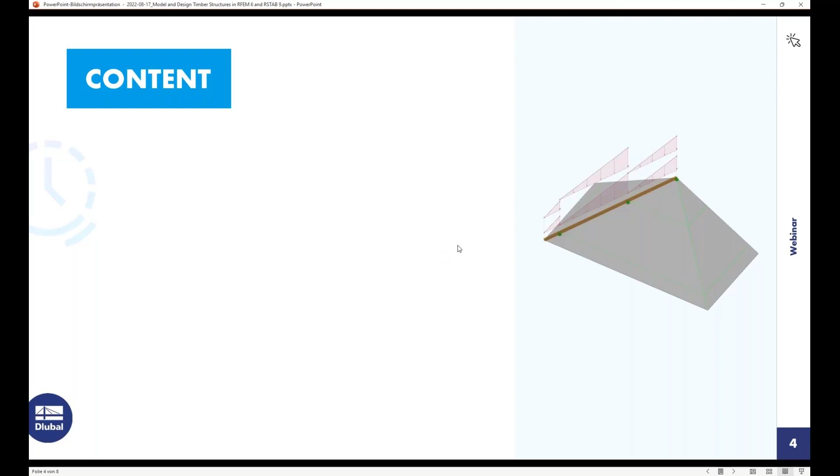Today, of course, I don't want to do a 3D structure again, because there are a lot of different ways and options to show things. Today I'll present a really small object. But let's go to the agenda. We will model a hip rafter for this hip roof, or a part of a hip roof. I will not model the whole roof because of time constraints. But don't get me wrong, I don't want to show you how to design, in this case, a two-span beam with a cantilever. That's actually not the aim.

The aim is, of course, loading. How do we get the loads on this beam, when we talk about the tributary area? That's maybe not so well known, how to get these tributary areas for this kind of beam, and that's one big issue.

And of course, we will design the component, in this case the hip rafter. We will spend a bigger focus today on the printout report. In the last webinars for the design add-ons, steel, concrete and so on, we didn't spend much time on this. Today I want to spend a bigger focus on it, since this was always asked. The aim is to get a really small documentation with all necessary inputs, without creating hundreds of pages, for example.

The reason I show you topics 1 through 4 is topic 5, which is about parameterization, blocks, and scripting. The aim is to give you an environment where you can use this beam, or this kind of beam, easily and repeat the input. For example, with parameterization, where you enter just a few values, the length, the inclination and so on, to get results really quickly. And this is the big aim.

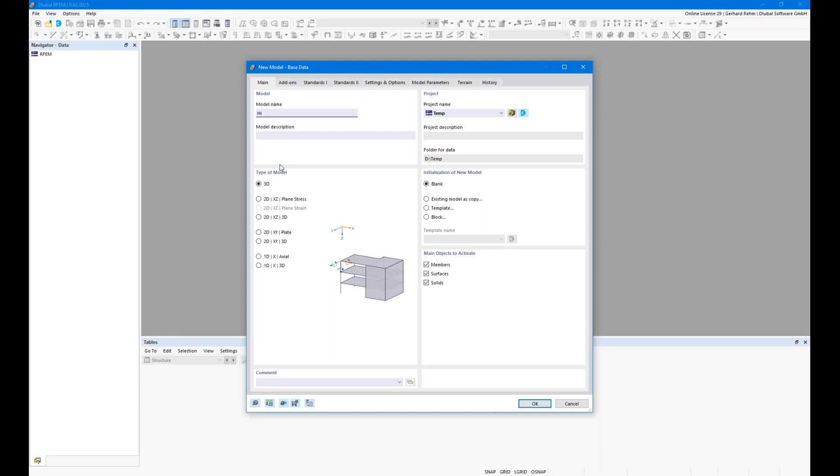Okay, so let's not waste more time with the presentation. I will go directly to our program, to RFEM 6. I will not mention all the changes compared to RFEM 5, because we already did this in our previous webinar. So I will give it a name, hip rafter, and I will activate the timber design add-on.

I don't need the load wizard because I will apply the loads manually. We can select the standards; in this case, I select Eurocode 0 plus the SLS combinations for timber, and I'll leave it at the global Eurocode. Of course, you have plenty of national annexes as well, but we'll leave it with the global Eurocode. That's all for now, and then let's create this hip rafter.

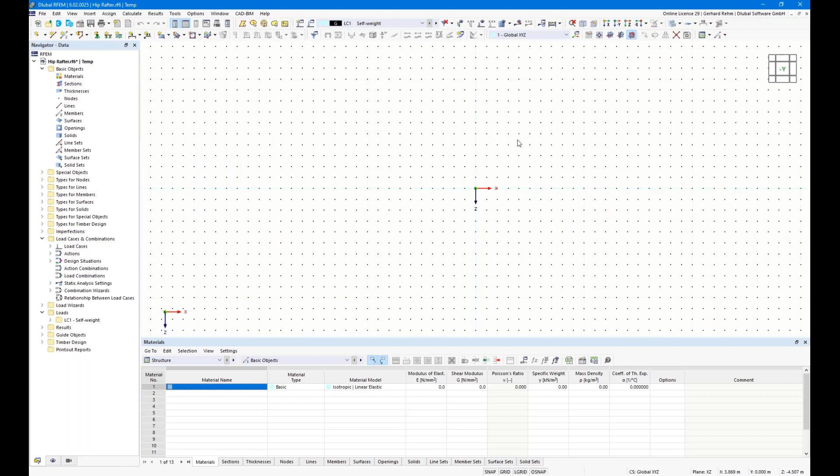So the normal roof should have an inclination of 30 degrees, and let's create the beam. I use this tool, length and direction, and select this line, length of 10 meters, and I need to change this angle to 120 degrees to get an inclination of 30 degrees. All right, here we go.

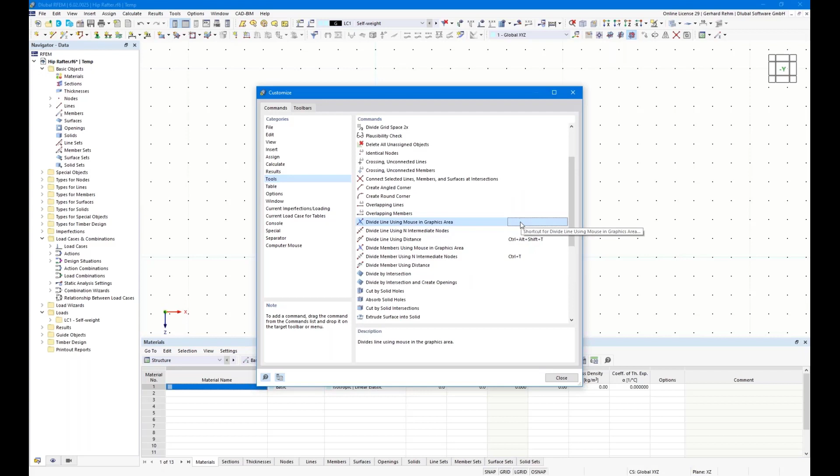Now I need to create a cantilever and the spans in between, so I will divide this line. There's already a shortcut for this option defined. You can define shortcuts under View, Customize Menu and Toolbars, find the correct tool and apply the shortcut by double-clicking it. So I hit my shortcut, and I will divide it for the cantilever by 0.8 meters with a projected length of 0.8 meters. Again, the half width of the building should be 6 meters, so I will enter 6 meters here.

Okay, and I will add another purlin, the same as we see here on the screen. So we have a purlin here on the bottom, or a ring beam for example, and here we will have another purlin or maybe walls, so it depends on the construction of course. So I will divide the line again at 3.50 meters.

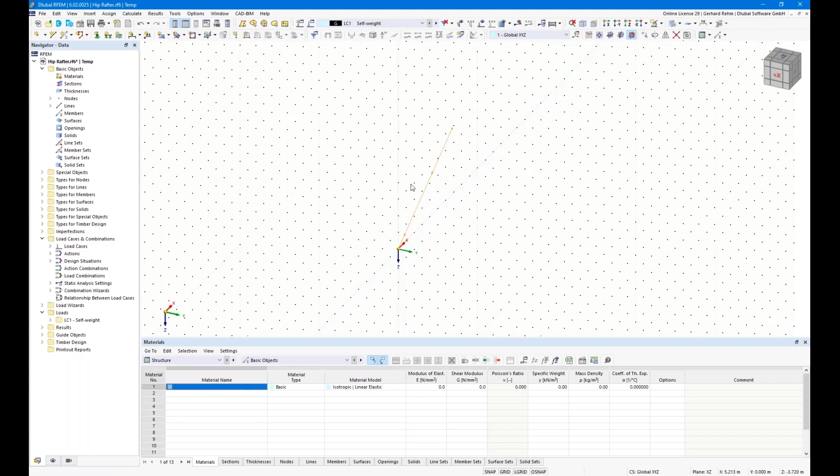All right, so that's it for one roof side. Now I will create this hip rafter. We choose the same inclination on both roof sides, so in this case it's easy. There are more options to create this hip rafter, but of course I can show only one.

So let's create a copy at a distance of 10 meters. Here I use this option, step links, and I can directly add lines in between the nodes. Okay, I will rotate it by 90 degrees, or minus 90 degrees, around the apex. And I will copy and move these lines minus 10 meters.

And that's it actually. Now I will use the connect tool, which is over here, and connect all the lines. I can delete the unnecessary lines and nodes again. Switch off the grid, and now you can directly draw this line, which represents the hip rafter.

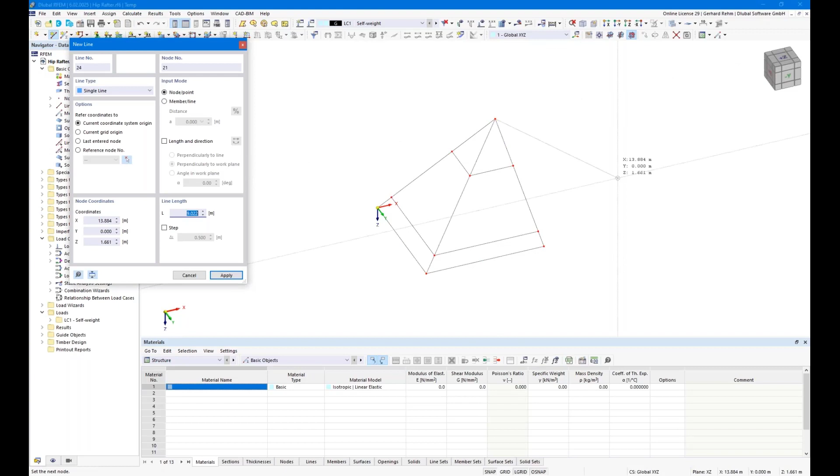All right, we will mirror everything around the mirror plane, which is in the YZ direction, or in the YZ plane, and the point B is exactly here in the apex. Okay, so we don't need this line, and this line, and this line, and also not the nodes, so I will delete them.

Okay, so let's define the rafter. We can use the tool here, create new single member, or we can just select the lines, and I will activate the member option, and now I can assign a cross section and a material. Okay, let's start with a cross section.

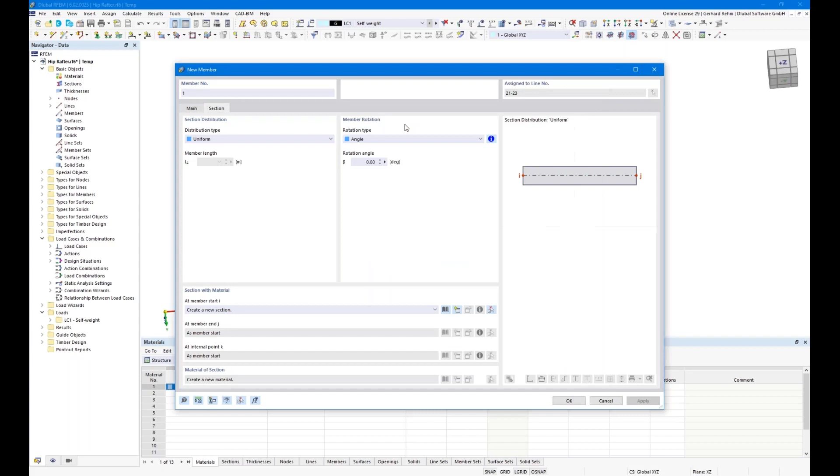In this case, the minimum height of the hip rafter depends on the jack rafters. So let's say the jack rafters have a height of 20 centimeters, and because of the inclination of 30 degrees, it's 20 divided by cosine 30 degrees. So the minimum height is at least 23 centimeters. Let's start with 24 centimeter height. But of course this is not the full truth.

When you think about some notches like the bird's mouth cut, or the cuts on the top side, there are also different sections on the bottom, but we will come to this later. First we start with a simple rectangular beam. All right, so let's start with 100 by 240.

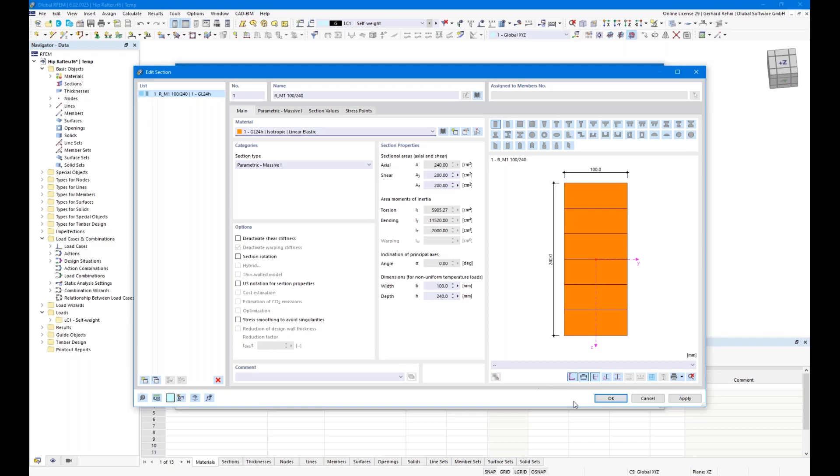And let's assign a material. In this case, you can use the filter or just enter your material directly in this search function. I can select this material, GL24H according to EN 14080. All right, that's it so far. I just hit the OK button, and now I have this beam.

I don't want to have the beam also here because it's symmetric. So I just added this to the structure to show you what is possible with loads and so on for later. Okay, then of course we have the beam, we need support, so I create just two nodal supports. Of course, I need to rotate the supports by minus 45 degrees in this example, so I fix the support on the bottom and the sliding support here on the top side.

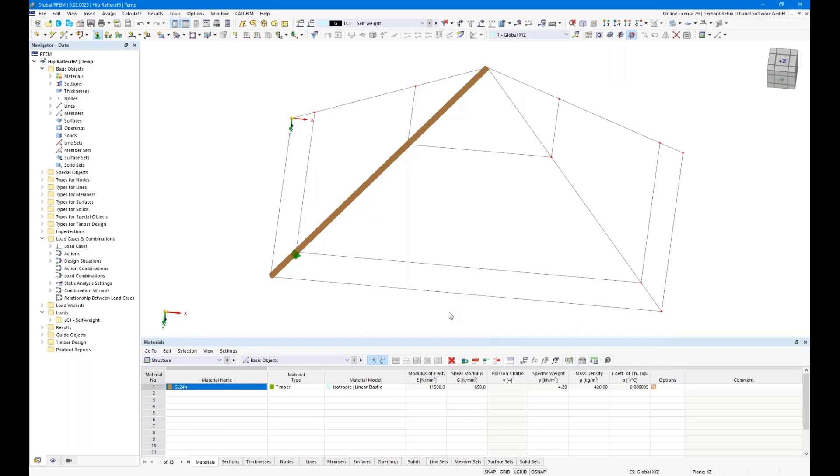Okay, new one, minus 45 degrees, and it should be sliding in the X direction.

So here we go, we have the model. Now we need the loads, and the question is how we get the loads on this hip rafter without modeling each jack rafter. That's the aim in this example.

Of course, I can add the jack rafters, but then I need to take care of the restraints on the bottom side. The full load in this case should go to the hip rafter for the design, but if I apply a fixed support, maybe there is a restraint, and then the hip rafter will not get the full load. And of course, it's more complicated, more time consuming to create all these jack rafters. I want to show you an example today of how it works without them.

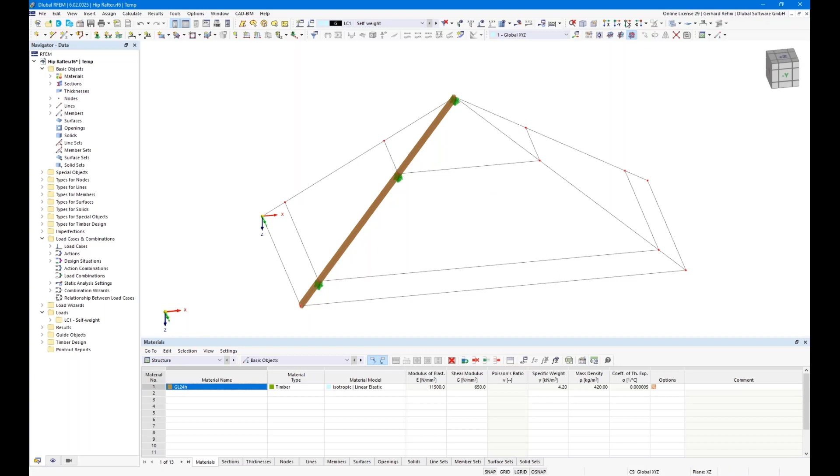Let's create a screenshot first, and let's talk about the tributary area for this hip rafter. When we think about the classic hand calculation, how we did it in the past, we have to think about what is the tributary area.

Let's focus here on this second span. I will create a copy of this, and I have these two points or nodes here, which is exactly in the middle. So it's just geometrically, we have no continuous effect, it's just the basic.

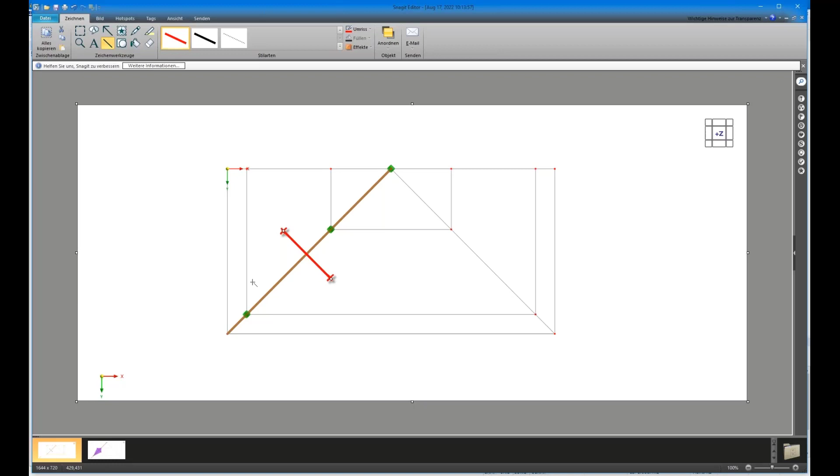How do we get it? We get it by dividing it by 50% of the span length. Now we can measure our tributary length by measuring this distance, depending on the projection plane and so on. But when we are in the projected area, we can use directly this value. The tributary area in this case is exactly here, this purple highlighted area.

But of course, I don't want to do this always manually by hand, by measuring something, and this should be done automatically in the software. I will show you how to do this. So the question is only how. Maybe you know about this option, which was also available in RFEM 5, member loads from area load. Maybe we can check this out.

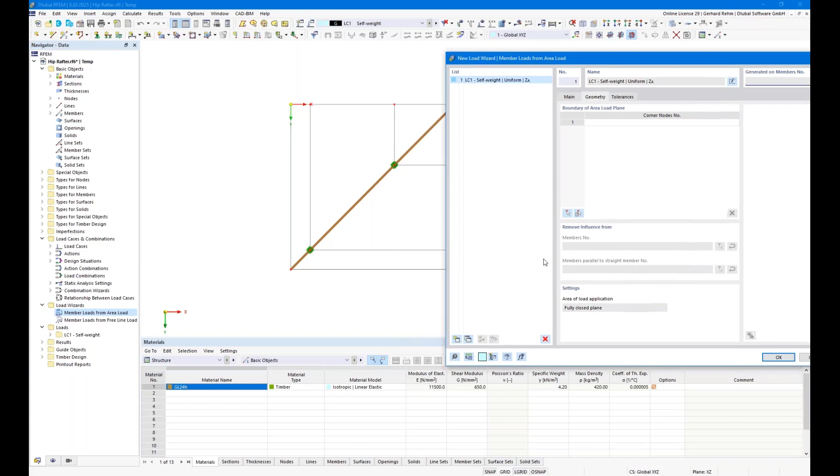So what we need to do is define a load magnitude per kilonewton per square meter, and we can define a plane, and we can load members. But of course, I don't have members here, because the whole load should not be covered by the hip rafter alone — it should also be covered by the purlins or walls. And you see, it's only possible for members.

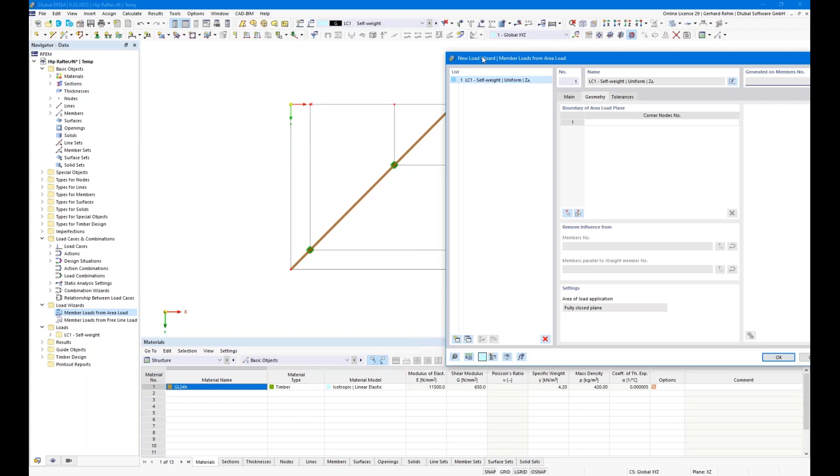Of course I could create here a kind of pseudo member to get the correct distribution. But another disadvantage with this member load from area option is that it's actually an isotropic load distribution, so we don't have the option to say the load should be distributed in global X direction. This is not possible with this option. So in this case, I have a better option: I create a new surface, and here we have a new surface type called load transfer. What I will do is create this surface now.

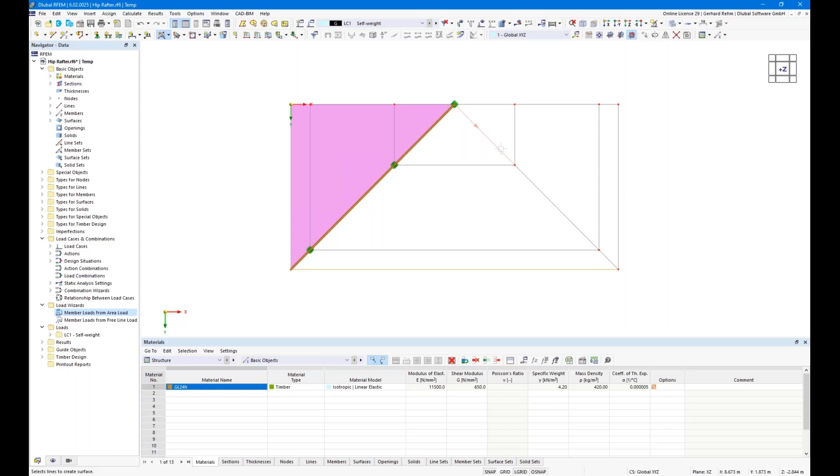All right, so now you see we have this surface. Maybe I will create directly all the others too.

I want to distribute it in Y direction.

Gerhard, is there something? Yeah, we lost a little bit. We lost some seconds, we couldn't hear you, but now it seems to be okay. Oh, sorry, should I repeat something or just continue? Maybe the last two sentences, to be sure. We didn't hear something. Okay, I'm sorry, maybe for 20 seconds also. Okay, good, thanks for the information.

So we are looking to apply the loads here in Y direction. That's why we check the axis system, and here we have the option to define the load transfer direction. In this case, I want to transfer it in Y direction. Just click OK, and now let's apply a load.

In this case, an area load — a typical surface load, nothing special actually. Let's apply a load of 1.5 kilonewton per square meter, which is really heavy for a roof, but not so uncommon.

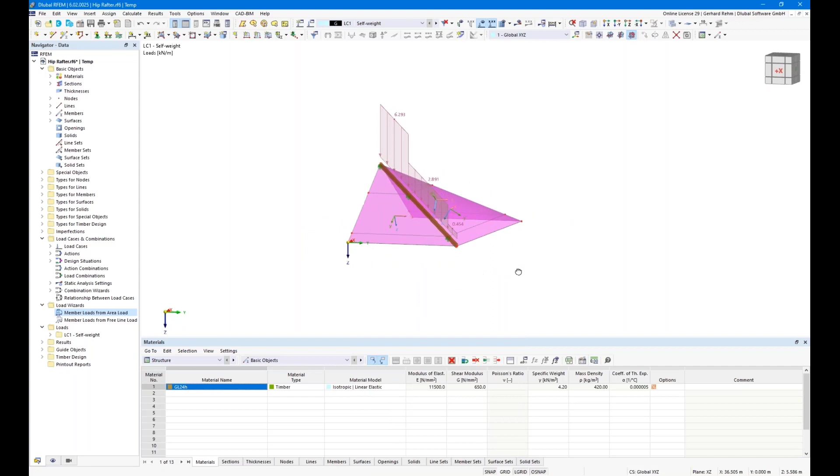You see here our area load, nothing special, but of course you can check the load directly on the beam as well by right-clicking the surface and selecting display load transfer separately. Now you can see how the load is distributed here. It's constant over the element, but you can change this easily.

Just go again to load transfer and switch this to varying. This will also be the new default setting in the future version — it should be available, I guess, next week, so that varying is the default value instead of uniform. Just click OK, and you see, it is exactly as expected — but of course there is no load here on the purlins or on the walls.

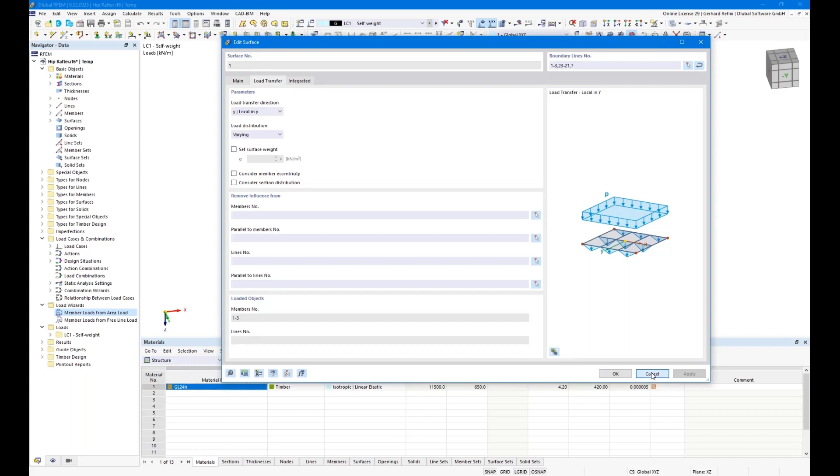Because right now the hip rafter is covering the whole load from the whole surface, which is of course not the truth. But how do we apply the load on these lines too? When we check the load transfer surface, you see the loaded objects can be members or lines, and that's the big advantage compared to the member loads from area load option. But you see there is no load, and that's clear because there is no stiffness defined on these lines. So either define a member or just define a line support.

So let's do this and you will see directly what's going on. When you apply the line supports, it's directly changing the load distribution as well for the hip rafter, and this is exactly what we are looking for. The distribution on the rafter looks really nice so far, and as I expect.

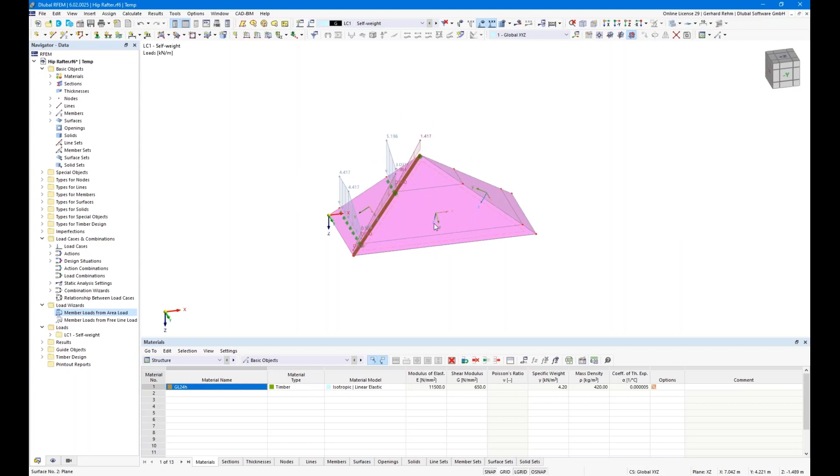So we will do the same also on the other surfaces. I need to define a line support everywhere where we have stiffness. Now we can apply the load. It's 1.5 kilonewton, I guess we have it already here. Just add 2 and 3.

Yeah, and that's it. The big advantage here is you will get directly the loads on this wall for the further design, or for example for the purlin. Of course you can delete the line support here and apply directly another beam, connecting it with a hinge, for example to consider the purlin. You can also consider a column underneath, that's also possible. But of course, for today's presentation, I will just focus on this hip rafter.

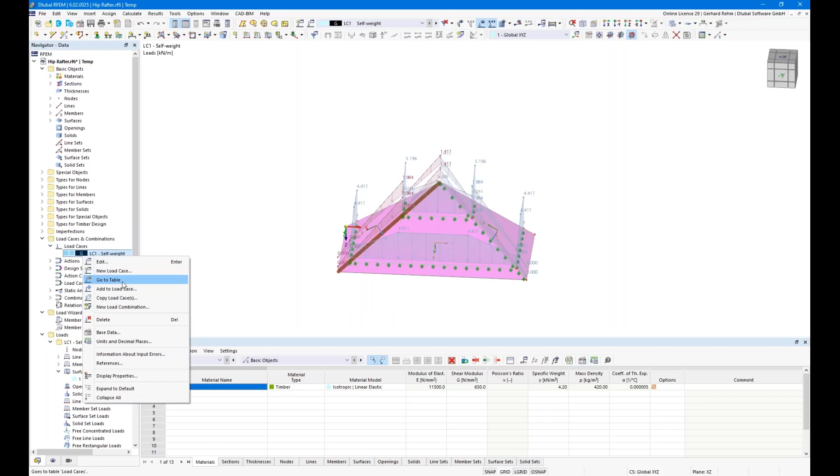So we have defined the loads for load case 1, self weight, and we will create another load case. I'll just copy the load case and apply a snow load. I'll deactivate the self weight, of course, and define snow here. Action categories should be snow, less than 1,000 meters. That's all. You see directly, depending on the action category, the load duration is set automatically.

We will skip wind loads and so on, it would be too time consuming now, but it's actually the same. You don't apply a global load, in this case you apply local loads. That's also possible. All right, then let's go through the load combinatorics.

Of course, we have the design situations for ULS and for SLS, and the result of the design situation. Maybe we can select all of them and switch this from second order, from P-delta, to first order, meaning geometrically linear analysis, which is enough in my example.

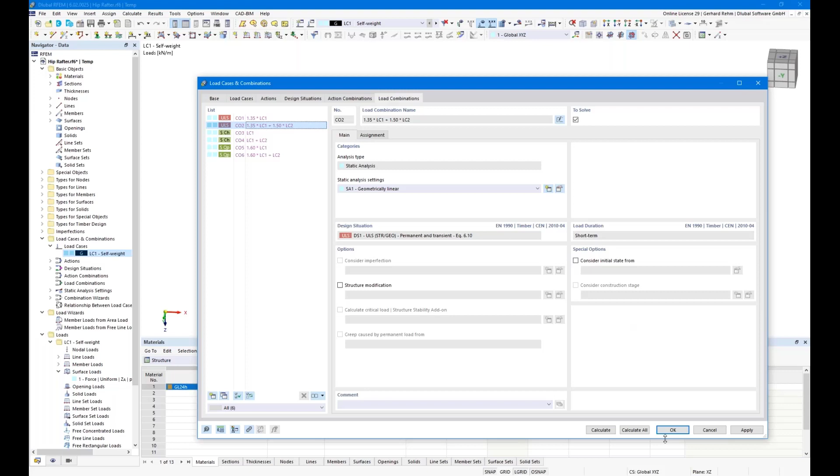Okay, so let's check the load combination. Of course we get all relevant load combinations, and the related load duration as well for each load combination. So far for the load combination, and let's focus actually only on this hip rafter.

So I will create a visibility, and I will define some parameters for the design. So we finished with the loading, so now we can focus on the design.

So here I have 3 separate members. I could also model this as 1 member and use intermediate nodes, this is also possible, but in this case I use 3 separate members, and to bring this back to 1 beam, I create a member set. So we name this hip rafter.

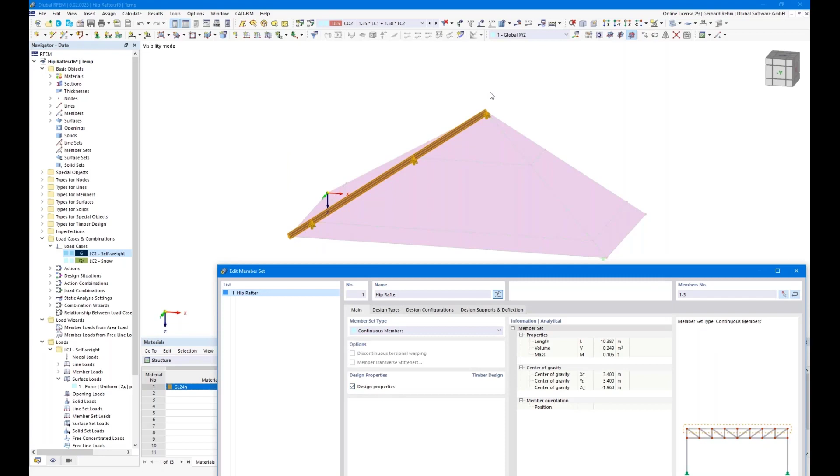And we want to take over the design properties, so I don't want to have the design properties on each single member. I want to see it on the global, or on the complete member set. Okay, so let's go to the next tab, design types. Here we define some specific stuff for the design.

We have effective lengths, let's see what's to do here, and let's check it. We have to ask ourselves if stability is an issue here in this case. When we think about buckling around the Z-axis, so we have a lot of jack rafters here, and I can definitely say that buckling around the Z-axis is not an issue here, at least when we have jack rafters every 70, 80 centimeters. So I can deactivate buckling around Z-axis.

The same for lateral torsional buckling in this case, there will be no lateral torsional buckling occurring, so it is not controlling in the design, definitely not. For Y-axis, okay, when you think about it, the normal forces are really small, I can imagine buckling around the Y-axis is also not a big deal, but let's define the parameters for it anyway to show you how it works.

In this tab, you see we have the support types, and we have one support on the start and one on the end. This is the default setting, but of course we have these intermediate nodes.

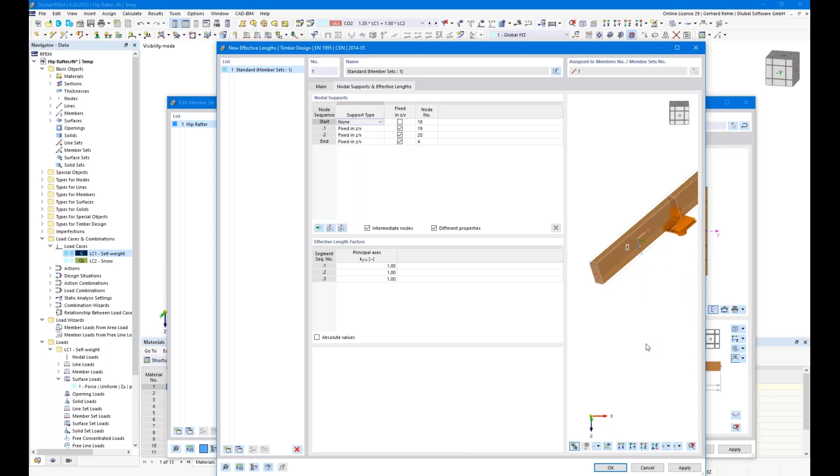So I will insert this intermediate node. So we have two intermediate nodes, and we have it fixed in Z direction, so around the Y direction. But of course, here on the cantilever start, I have no support. So, and you can see here, these are my buckling lengths. We have one for the cantilever, one for the first span, and another one for the second span, which can be modified, of course.

For the cantilever, maybe we can set this directly to no buckling, since there will be no compression force in this rafter, in this cantilever. Okay, so that's it so far for the effective lengths for the design.

So the next step is about design configurations. Maybe let's have a look inside. Nothing special. Maybe we can neglect some forces, maybe a result of P delta analysis.

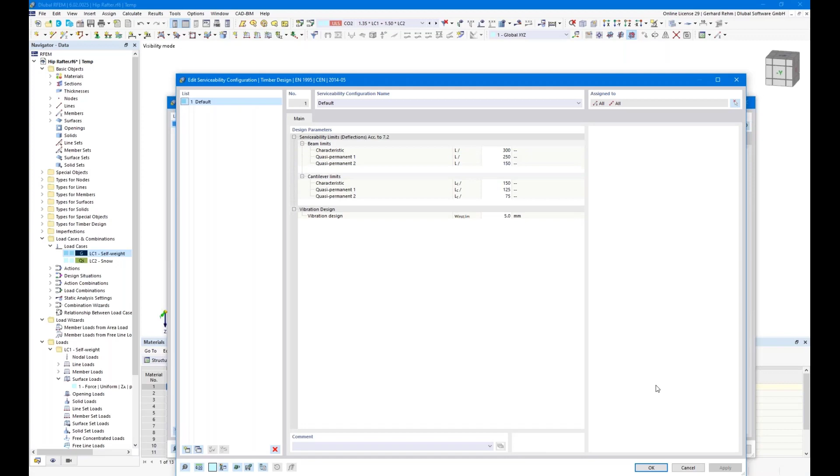We want to ignore some internal forces. This can be set here, or some additional setting, which I don't want to explain in detail now. The same for the SLS. Here we have our limits defined, L over 300 for characteristic, and so on. Okay, fire is the same, but we don't spend focus on the fire today.

Okay, so the next tab is important for serviceability. So as you can see here, we need a reference length for the serviceability. The reference length should be, of course, per span. As you can see here now, we have only one span. So if we would leave this as it is, it would consider the whole length of the beam as reference length. So in this case, it's 10 meter 38 over 300, for example. This is, of course, not the wished behavior.

How can we control this? We can control it by using these design supports. So maybe just hit the F1 button, and then the manual is loaded. And you will see here what is actually the function of a design support. And the first function is the definition of the boundary conditions for the design compression perpendicular to the grain direction, which was implemented in RFEM 6, and the segmentation of the members or set of members for the deflection analysis.

Okay, so we need to define design supports to get the segmentation. So in this case, for the member set start, which is here, we don't need a support, but for the second, or for the end, we need one. So I created it here. And here you can see we can enter a support length and this factor, this KC90 factor for the design check compression perpendicular to the grain.

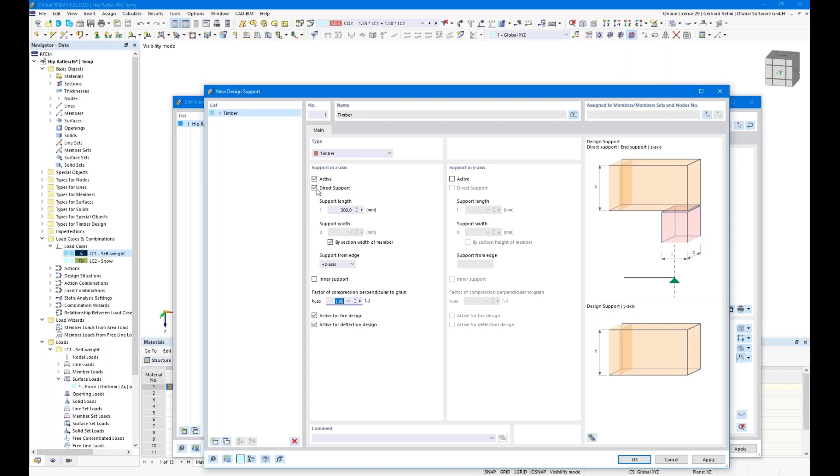But I must say it was implemented for this typical straight beam solution. When we think about this bird's mouth cut in the cantilever, it is not possible right now to consider this notch. So therefore, we will use the design supports here now only for the serviceability. That's why we set this to direct support, so we have no inputs for that.

Okay, so here we go. We will add this design support also on the intermediate nodes. And we check only the deformation in local z direction. And here you can see our segment length. So we have one segment for the cantilever, the next one for this, and the next one for this. And these values are used for determining the reference lengths.

Okay, so that's it so far. Just hit the OK button, and we will also see these design supports here. We can directly deactivate this design support since they are not important anymore for me. Types for members, design supports, and maybe member sets is not important for me. All right.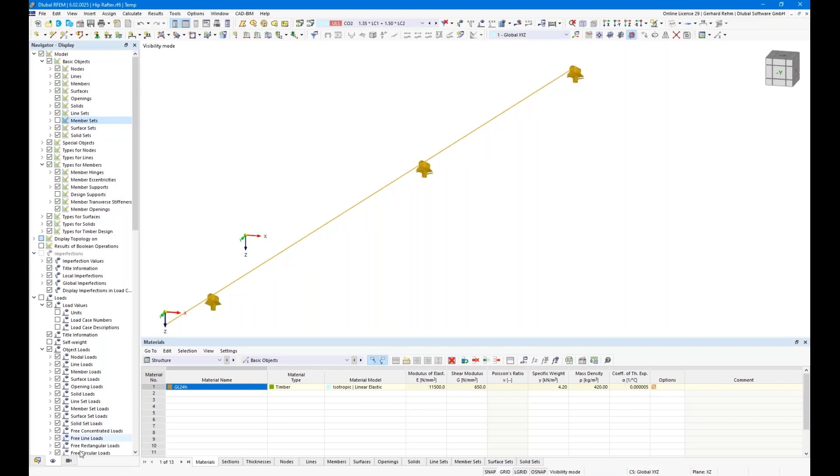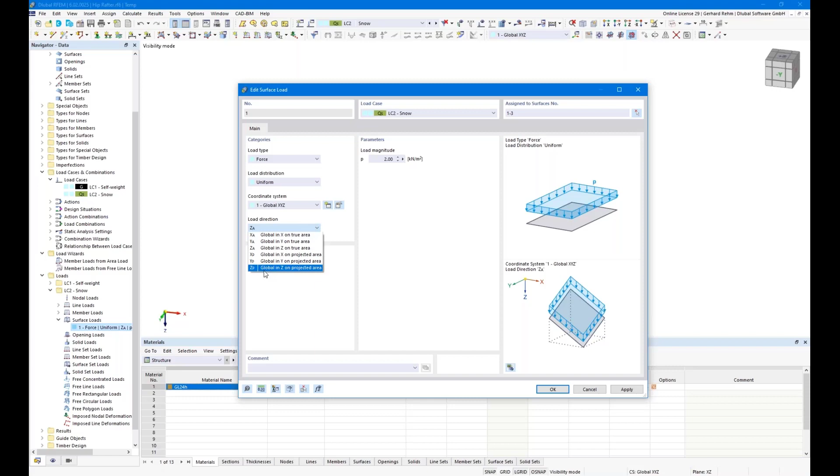Good. That's it actually. Maybe I forgot one thing because of the loads. Of course, I have copied load case 1, meaning we need to change the load for snow load. Let's apply 2 kilonewton per square meter. And the load direction should be, of course, projected.

So when we check the loads, do not wonder why the load is here displayed also for snow on the true length of the beam. This is a kind of specialty in this load transfer surfaces. They can only deal with loads and project it in the true length of the beam. So when we check it separately again...

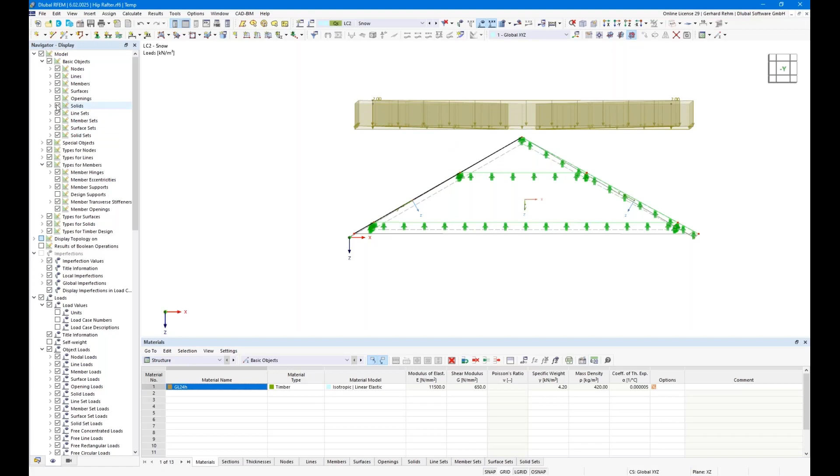Here we go. You see the loads are applied. Sorry, the loads are applied in the projected area, but the internal process converted automatically to the true length. So you must imagine it's a kind of umbrella. So when you flip the umbrella, it gathers all raindrops. It does not matter in which direction, whether it's gravity direction, or a kind of mix of gravity and lateral direction. So the loads are always displayed in the true length direction. Okay, but it's converted correctly, of course.

Okay, so let's focus on the design. So we have defined all parameters for the design. We will check this one. So we want to check ULS and SLS. I want to design not the members because I have no inputs for the members. So I have to activate this option because I want to design the members via the parent member set. Okay, I will deactivate this. And that's actually all for now.

We can directly run the analysis.

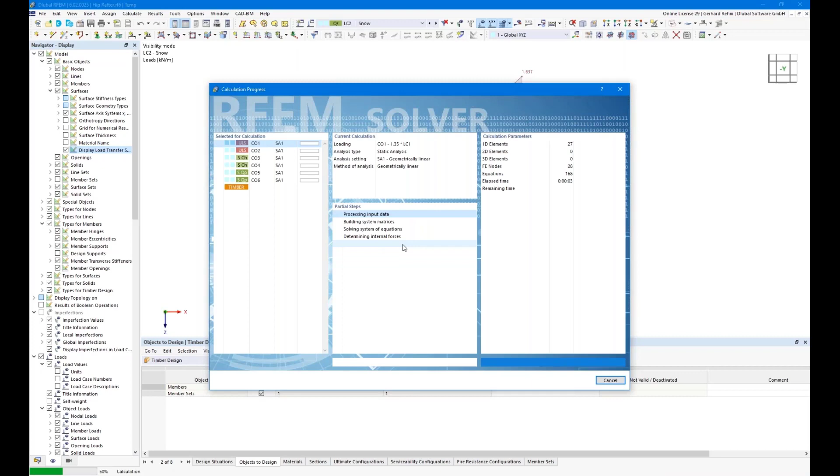But in reality, you will not check this deformation on this cantilever. So that's why you have the option here, member sets, to deactivate it. When you deactivate this option, no design check is done for the cantilever. And this is the option I want to choose here.

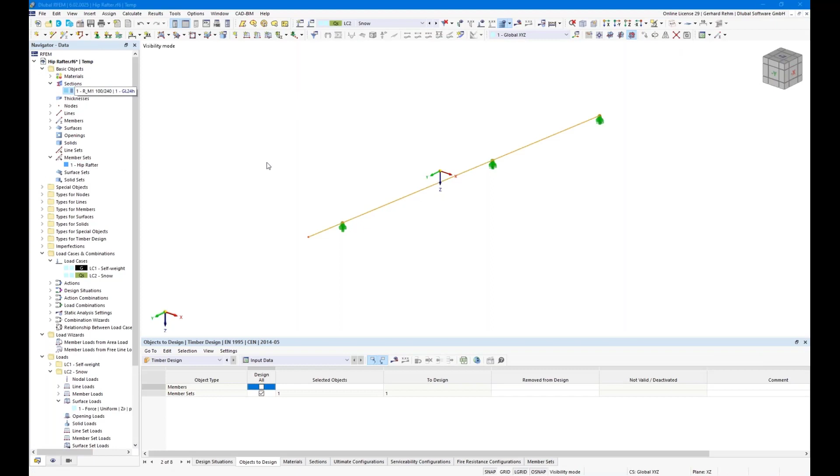Also here, because of the first span, the deformation was a bit too high, so maybe I will change this to 120 millimeter.

So let's run the analysis again. Of course, we have changed the cross section. We need to rerun the analysis also for all load cases or in this case load combinations, and of course the timber design.

All right, perfect. So that's our design. I don't spend time now to present you the internal forces and so on, I guess that's clear to everyone.

Let's have a small look at the design, directly design by member set. Here you can see all designs. There are a few zero values from neglectable internal forces or deformation, but you can define here a small filter, show only something which is bigger than 1%, for example. And then you see all design ratios which are done.

So we have tension inside the beam. We have, of course, shear, bending. We have bending and tension, bending and compression. We have stability check. So maybe let's check our buckling factor in this case.

You see the reduction here is not really much, it's from 100% to 86%, sorry. But when you compare the compressive strength, the compression stress compared to the bending stress, it's so small, nearly you can neglect it. It's 10, 20, 40 times smaller than the bending stress.

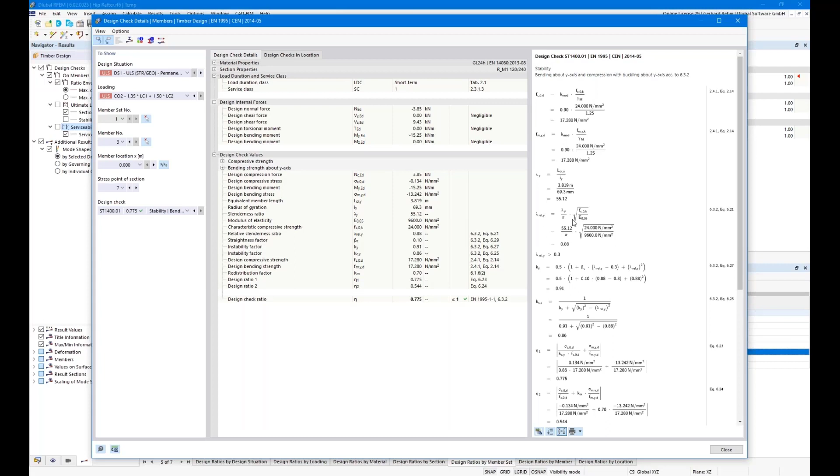As you can see, we have here our equations, so you can print this also to the printout report afterwards. You can follow each step, you can control or compare every value with your hand calculation. And this gives you a big insight into the program, so it's not a kind of black box.

You can also check here the ratio over the cross section, or you can check the stresses. So for example, normal force, that means the normal force is also really small.

Okay, so that's it for the design, it's nothing special. If you are interested in more details about the design, I recommend you watch our first webinar, there we spend more time for the results.

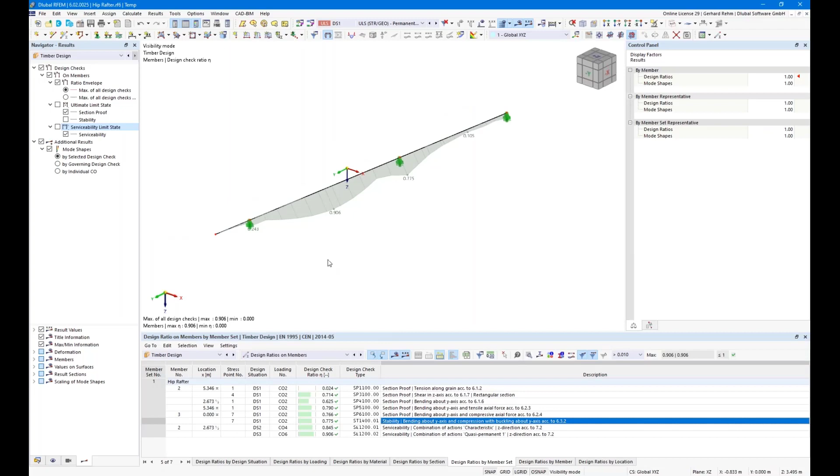Okay, so that's it so far for the design. Let's create a printout report. But before we create the printout report, we want to define a few views to create pictures more easily, and therefore we create a new coordinate system, because right now I'm not able to see the full length properly because it's not in XZ or YZ plane. That's why we create here a new coordinate system.

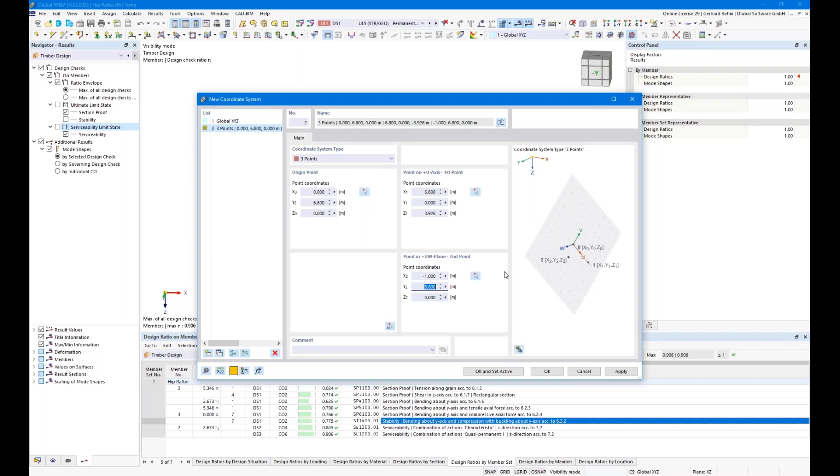So first point is here, the U-axis is defined by this point, and the plane is defined here. We change the coordinates easily. And this one should be in 0 coordinate, okay. And we'll see we have this user-defined coordinate system.

And now I'm able to check the view directly in W direction, and that helps me to get the full length.

Let's create a few views. So one view should be the geometry, loads, internal forces, design, for example. This helps me afterwards to create pictures easily for the printout report.

So for the geometry, of course, I need a dimensioning. In the current coordinate system, for this rafter here, second plane, and the offset should be 0.5. For projection in U direction, the first plane, and we define 0.5 meters, and the same for the projection in V direction by 0.5 meter.

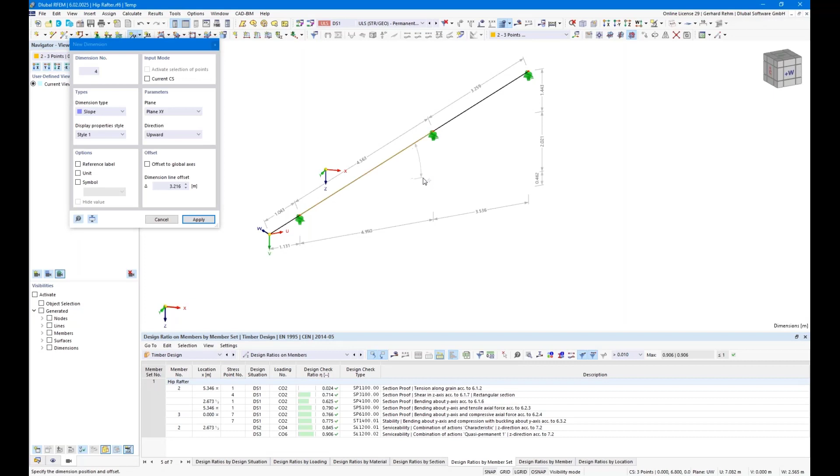So that's it, we need to define a slope dimensioning. Okay, so that's it, that's actually all about the geometry.

We can remove the global axis systems and watch only the U and V. The first view should be the geometry. All right, good. Let's switch off numbering of the members and the nodes.

Another view. So the second view should be 02. It's loading. And the next one should be internal forces.

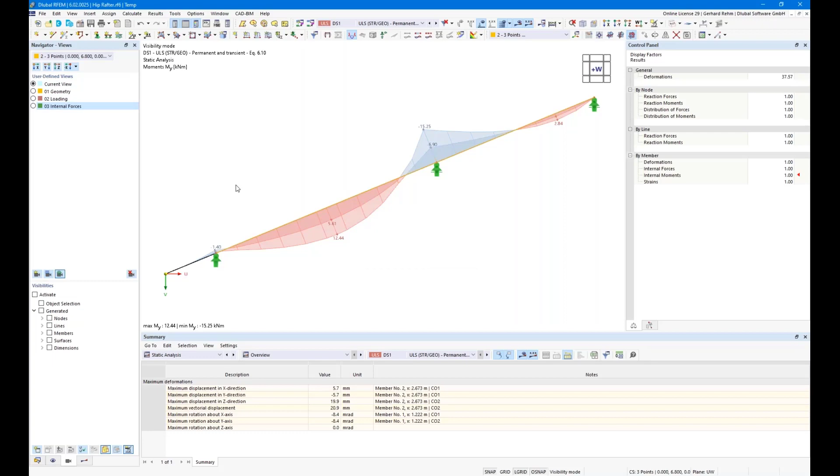All right, so we check directly here the envelope. So the third view is internal forces. And the last view should be the design ratio for the timber design.

Okay, so now let's check the advantage of these views. For example, when you cancel the view and change a setting, maybe apply a load, and want to go back again to this view, you can just hit this button here and you get directly the same view you created before. This helps me afterwards to create the pictures and so on.

Okay, so let's start with the printout report. Let's create a new one. And that's the biggest question which always comes up: what setting should I choose here? Of course, without seeing anything, I don't know either. So I just hit the save and show button, and let's check out what the default setting gives us.

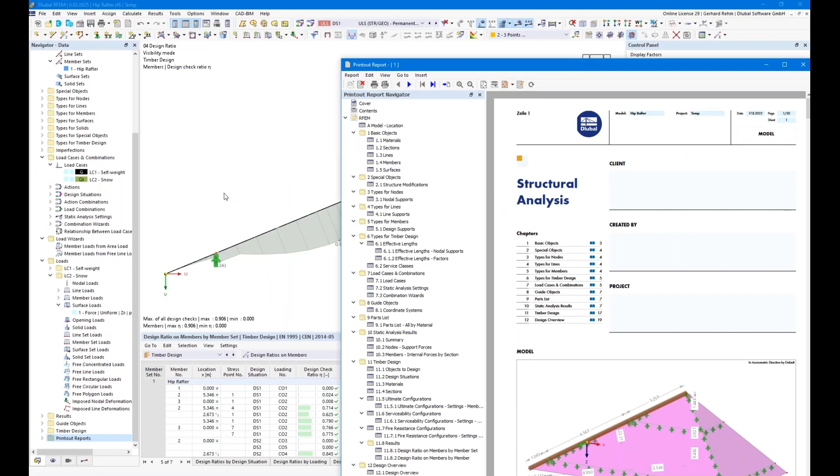Okay, so the big advantage in RFEM 6 is you can have the printout report next to RFEM. So you can work with both windows at the same time. So maybe let's start to remove something or just to add something.

Here you see a model overview. If you don't like it, just right click it, edit it. You will come back to this window here, and you can rotate it. You can define the window settings. So maybe this should be this size here, and maybe I don't want to see any dimensioning, and just hit OK button, and it will be updated automatically in the printout report.

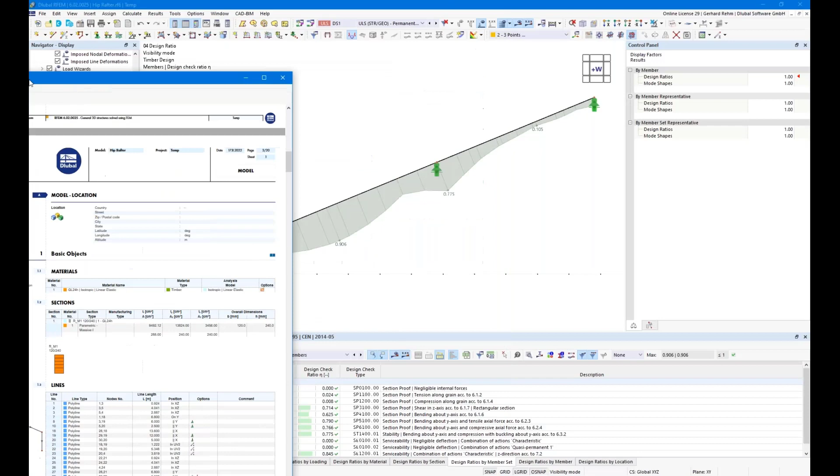Okay, so let's come to the next page. It's about the content. You can activate it or leave it, it depends on you. But let's start here with the settings, checking both windows at the same time. Then let's edit the setting, because this window depends on RFEM 6 on the table.

Okay, so model location, for example, in the base data, you are able to enter the location of the construction. In this example, I want to switch it off. Materials, okay, materials is interesting. Maybe you can activate the properties or not. I mean, everyone who designs a GL24 should know about the characteristics, but of course you can display the properties, strengths and so on.

Sections, of course, I want to see this in the printout report. When we talk about lines, you see here which line or which nodes are connected with which line, for example. To be honest, I'm not interested in this. The same for members, which line is related to the member, I'm not interested in, I will deactivate it. The same for the surfaces. In this case, the surfaces are only for the load transfer. I will deactivate this. The same for the special objects.

Here it shows me, okay, when you analyze according to second order analysis, you need to consider the mean value of the stiffness, but I have a linear analysis, I will not show this information. Nodal supports are important, of course. In my example, I activate this option, rotated via 3 angles, to get also the angle or the rotation of the supports. Line supports, I don't need this. Type for members, design supports, I'm not interested in this information. Surface supports, I don't have any surface support, so I can leave it or not, but it does not matter.

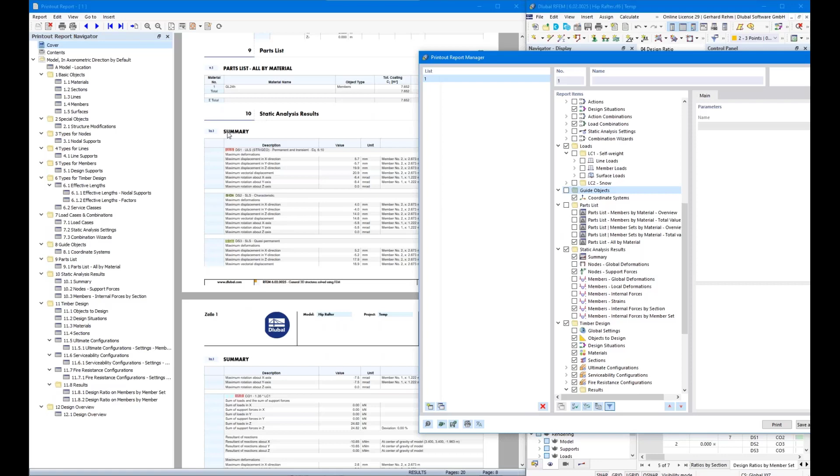Here we see the summary - for each load combination, we see the sum of load, the maximum deformation, and so on. For me, it's not important, I will deactivate it. I'm interested in the nodal supports, for example.

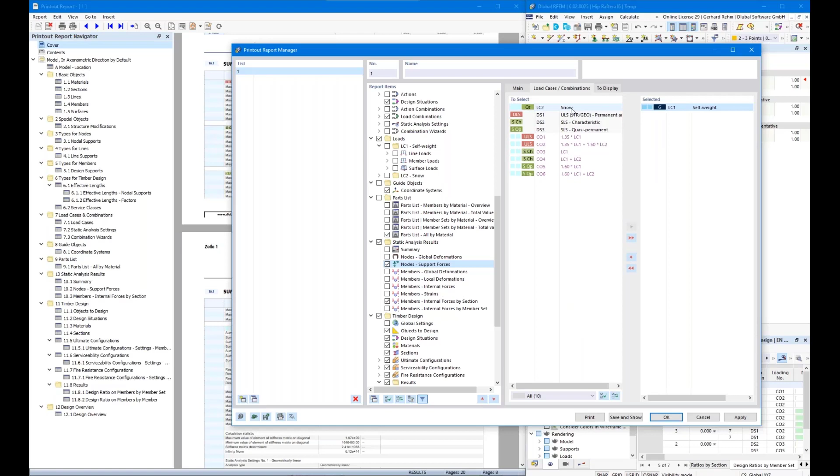But in this case, I will define it only for a specific loading - so in this case, it should be for self-weight, snow, and the ULS combinations. That's it.

And here I want to define some settings because I don't want to see all of these values. So when we go to nodes, yeah, you see the table is really long with a lot of information.

I'm just interested in the values, but not in the extreme values here. Okay, so far that's it.

Then let's go to the internal forces by section. In this case, I want to see the member internal forces by member sets, again for the loading, but of course not for all loading, only for design situation 1.

All right, and I will define also here some settings. I don't want to see these values, this, and this, because this is the envelope - I want to see only the extreme ones. This helps me to reduce the table much.

Okay, that's it so far for RFEM side. Now let's go to the add-on side. When we check the add-on, we will see a few settings here. Maybe we can skip one of those, same for the materials, because the materials we already have here in the basic objects, but let's leave it.

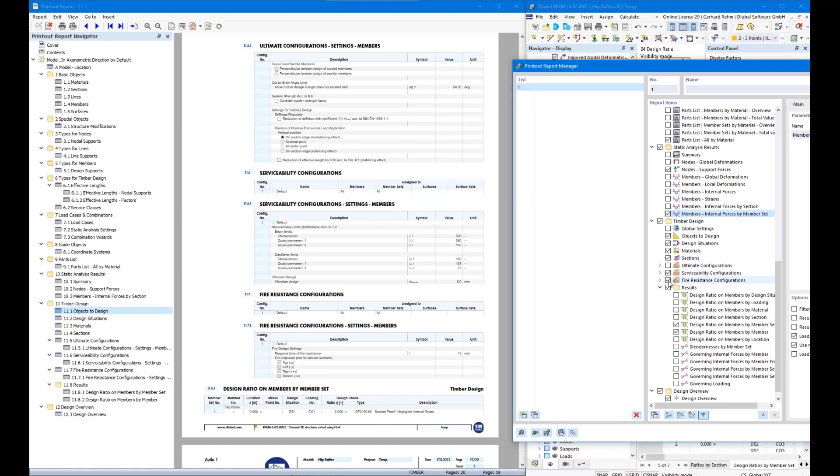Ultimate config, we can deactivate - in my opinion it's not necessary to show, but serviceability config maybe is important to see which limits were used. Okay, we leave this, but fire, we don't have fire, so I will deactivate this directly.

Okay, and I'm interested in the design ratio per member set. And here I will activate as well this design check ratio. I define 1%, and then I get only designs which are higher than 1%.

And I'm not interested in all this information about which member, which location, which stress point, and so on, so that's why I deactivate all this directly. Loading, maybe yes. Yeah, and that's it. Design overview, we can deactivate as well.

All right, let's hit the save and show button, and let's see. Before we had around, I guess, 20, 25 pages or something. Now it comes down to 6 pages.

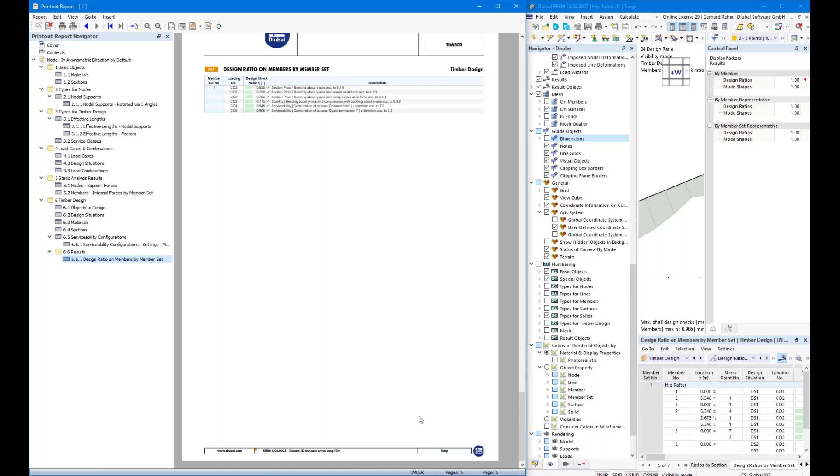And when you see here, yeah, the tables were really small and only the important values are listed here. And this is actually the aim, to have only a few pages for this rafter and not 20, 30, 40, 50 or more pages. Of course, nobody reads this.

Of course, you can reduce pages here as well. So for example, this page or the content can be removed, then you have 4 pages, and maybe you will find a way to reduce it to 3 pages. Yeah, but of course we need pictures. And now let's create these pictures, and that's why I created the views.

So I hit this button here, geometry, and now I will print it to the printout report. So here we go - we have this live preview, so you can activate or deactivate it. When you deactivate it, the input is a bit quicker.

So here I use the name geometry, and it should be window filling, and the height should be only 33% of the page. So when you hit the button again, you will get a preview.

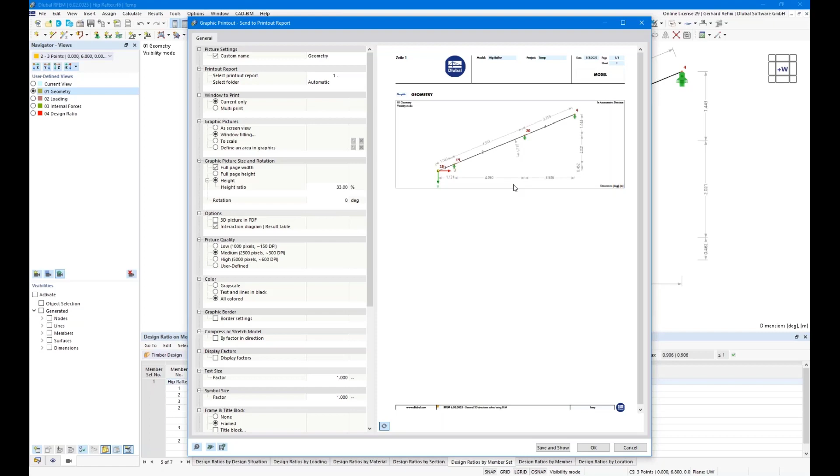All right, that's it. I just hit the OK button, and I go to loading and print this picture as well into the printout report. So this is loads, load case 1, and the same for load case 2.

All right, now let's talk about internal forces. In this case, I'll draw a multi-picture, or print more pictures in one picture. Actually, it's a picture-in-picture graphic. So I create a few new windows, in this case 2.

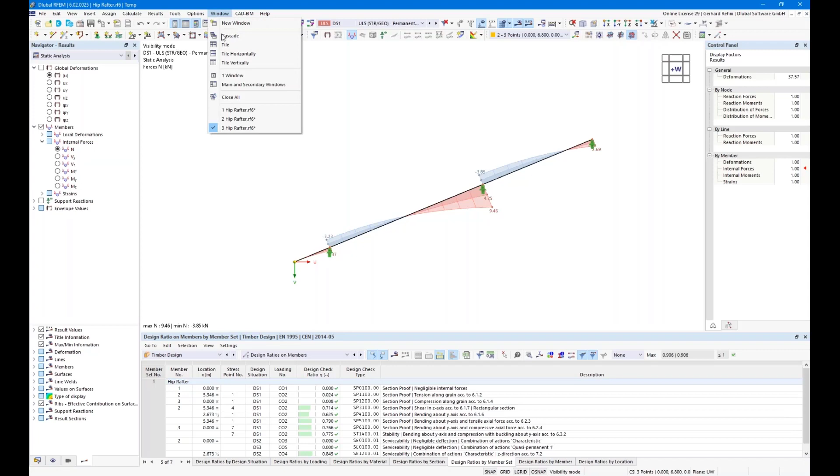Let's tile it horizontally. So the first one should be the normal force, the second should be the shear force, and the third one should be the bending moment. All right, let's print this picture.

I select the option for more, but not with 33%, let's say with 70%. Here we go. And one more picture about the design ratio. So let's switch this back to 33%. That's enough.

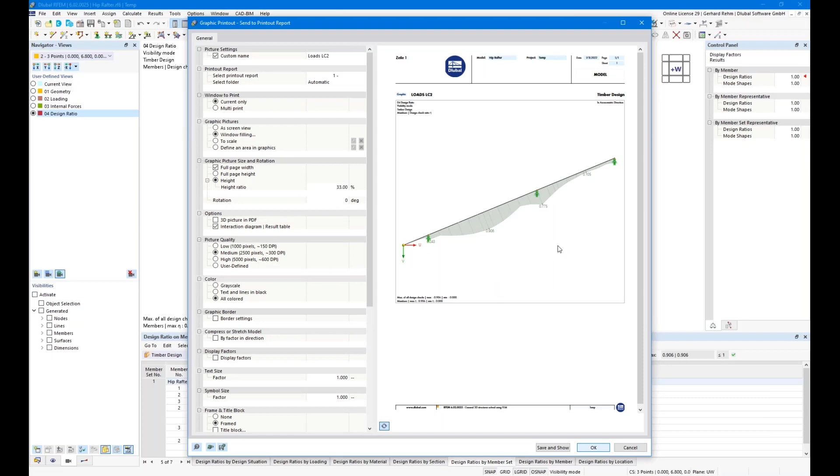Okay, let's go back to the printout report. Now you see 8 pages. We see the pictures. Oh sorry, I forgot to rename the pictures here - this should be called internal forces and this should be design ratio. But for now it's okay. So you see here we have 8 pages, and we have actually a nice, clear printout report created with, in my opinion, all necessary information.

So that's it so far for the printout report. Of course, here in this printout report manager, you can create templates, save it, and use it in another file, or just open this file again, change the parameters, or change the length of the beams and so on.

And that brings me to the next topic, number 5: parameterization and scripting. Of course, if you have this part really often - if you have checks for hip rafters or different kinds of beams really often - I don't want to model everything the same way I did in the last 50 minutes.

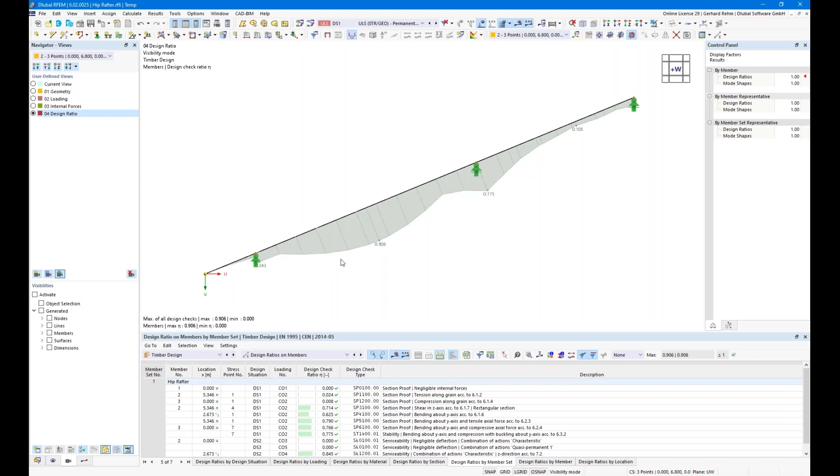So that's why you can use different options. I prepared everything already here since I have no time to do this in real time. So here we have the structure - it's the same structure, but only with 2 hip rafters modeled, and also the rafters here I have modeled. And this model works with parameters.

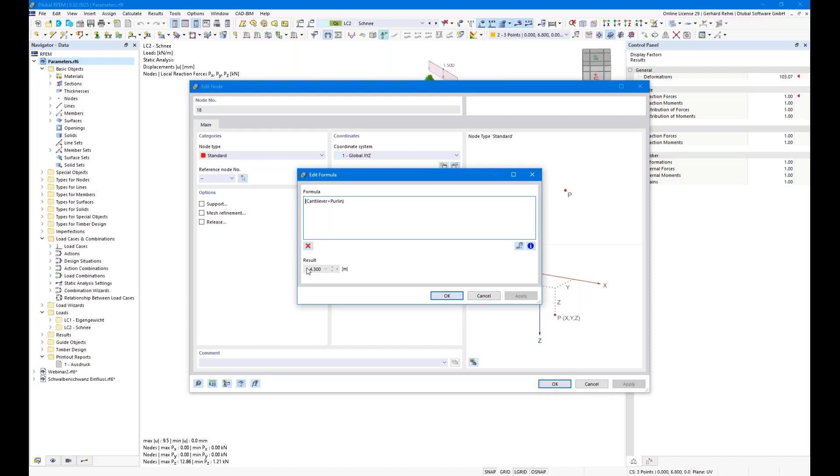So when we check it here, I have parameters defined, and each parameter is connected to the node coordinate. So you see this yellow corner, and when you check the formula, you see we use these parameters - cantilever plus purlin - to get this coordinate of 4.3 meters. So cantilever plus purlin is exactly 3.5 plus 0.8.

And the big advantage now is I can change the parameters easily. So maybe let's check this printout report first to see the difference between before I change parameters and afterwards.

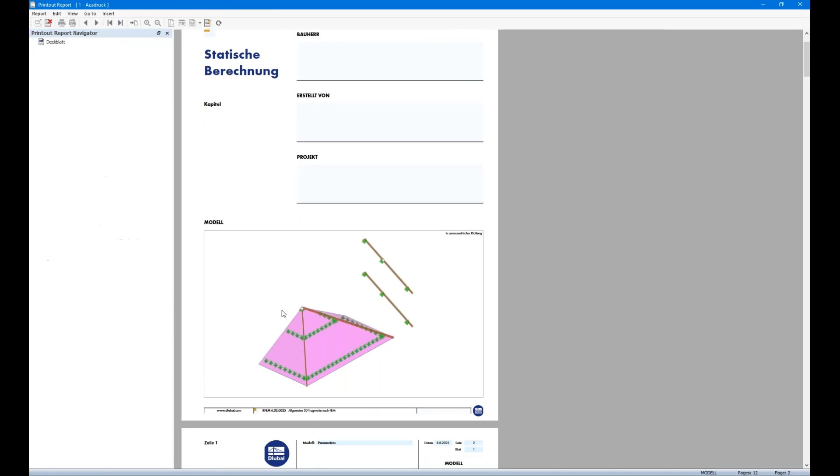All right, so maybe let's check the geometry - this is this picture here, about the hip rafter and the rafters, the dimensioning and so on. Maybe I can bring this next to this. Let's remove this one here and this one. Of course, it's a big advantage if you have a second monitor, because with one monitor it's really too small. Okay, so let's open the parameters again.

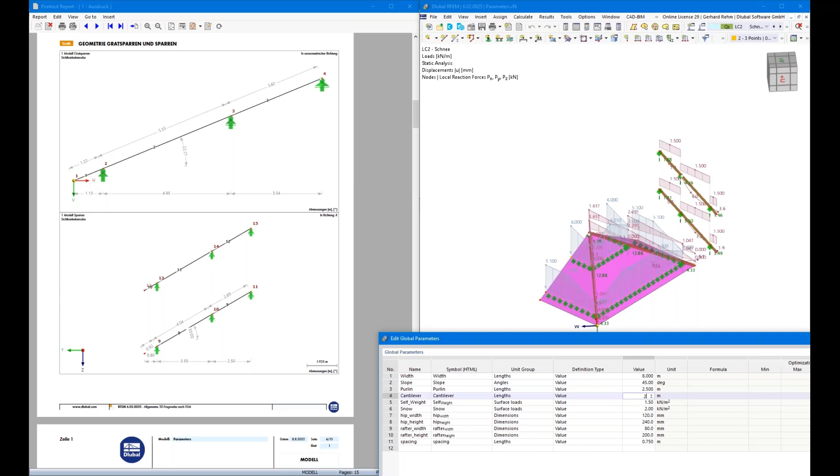So when you finish with all these parameters, you're able to change this. So let me create an extreme example. Let's say 8 meters, and the slope should be 45 degrees. The purlin should be located at 2.5 meters, and the cantilever is, for example, 2 meters - also for dimensions and for the spacing, which is related to this load on the rafter.

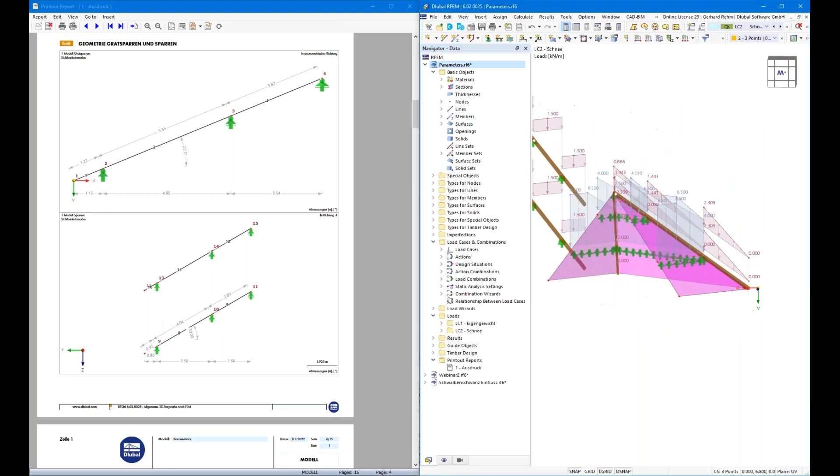Okay, and when I hit the OK button, you see the geometry will be changed automatically. Sorry, this was not my aim - this switched automatically to the next example. So yeah, here we go. You see the inclination was changed to 45 degrees and the length was changed to 8 meters.

And now we can simply update our print report. Hit this update button, and we get automatically all information into this printout report, without creating a new printout report, without modeling something. It's just about checking the dimension of the hip rafter - if the design ratio is still okay, if not, optimize the cross section, and then you can reprint everything again. All right, let's close the printout report and come to the next topic.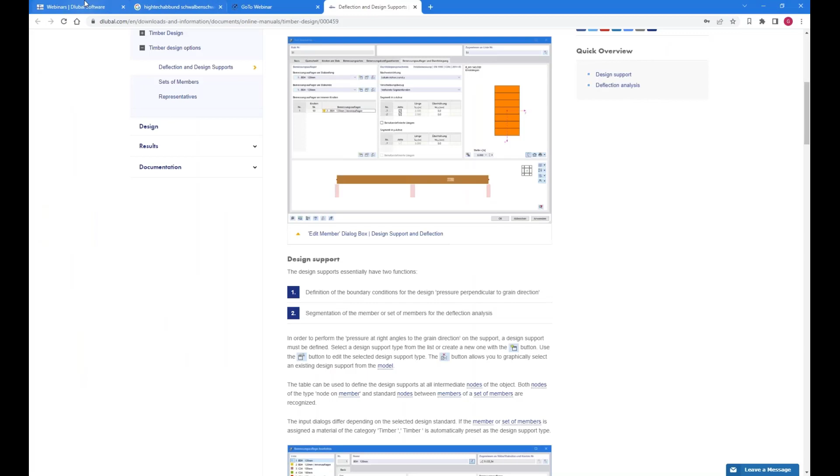It's about parameterization as well, but it's about scripting. Unfortunately, I cannot spend so much time now on scripting, but we did a webinar a few weeks ago about scripting - you can find it also on our website's webinar page. But what is the big advantage here for the scripting tool? I have prepared a script, so let's...

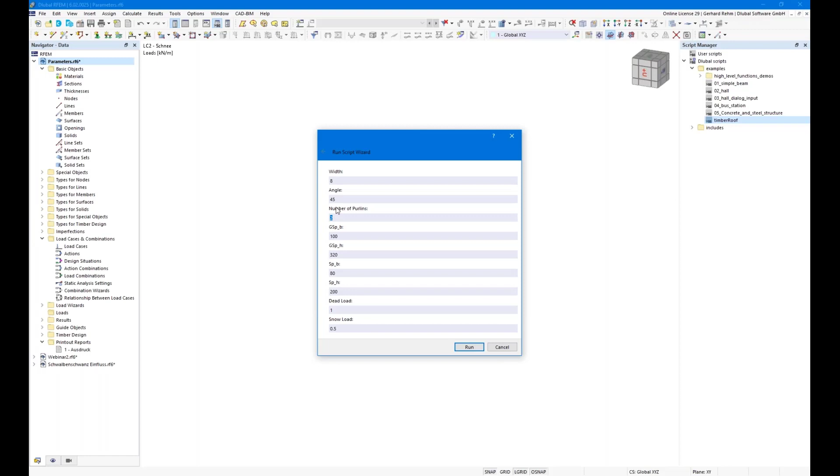Delete all of this and run the script. So it's exactly the same as what I prepared in the last 50 minutes, but here I can easily define the parameters - for example, again 8, 45, number of purlins. So I have the option here to program with JavaScript how many purlins I want to use, for example only 1 on the bottom side. And when you hit the run button, the script runs, and you will get the geometry with only 1 purlin.

If you run the script again, for example with 2 purlins, you will get an intermediate support here. So this is all possible. Of course, it needs a bit more experience with programming and so on. But if you're interested, please follow the webinar we did about scripting.

Okay, so that's it for this example. Of course, you can save blocks. We have here this block manager. I guess it's also shown in the scripting webinar, but you can save structures as blocks and load the blocks as well. That's also possible, but I will skip this part for now. You see there are already a few blocks defined, but not for now.

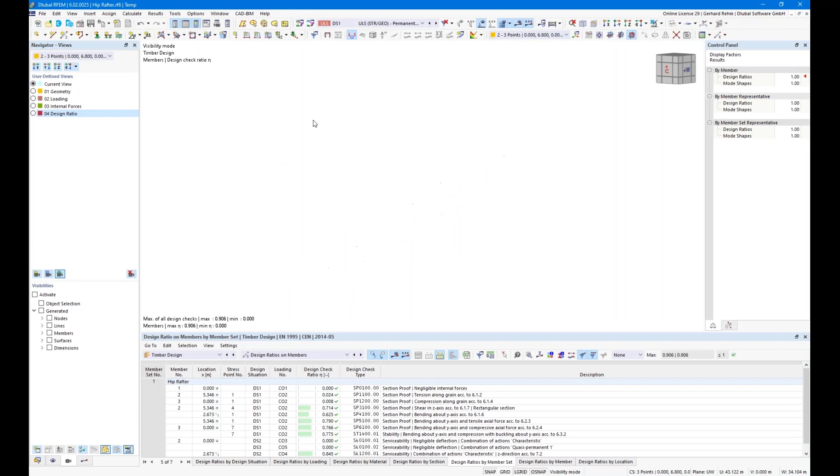Okay, then let's go back to the hip rafter again. As you remember, maybe from my previous example, this one - we have defined here a rectangular section for this cross section. Let's check this out.

Of course, we have some cuts here on the top side for this hip rafter. We have some bird's mouth cuts here on the bottom side, and of course we need to consider this in the design. You can calculate on the safe side with the netto section, but that's why we have also implemented these typical timber cross sections.

So in this case, you can directly start with this typical hip rafter section. Also for the valley rafter it should be available here, and also when it's cut on both sides, that's also possible.

But when we think about connections, how to connect the beams to the hip rafter - where I lived, it's really typical to use dovetail connectors, for example, because you don't need additional fastener. Of course you will apply fully threaded screws, that's clear for uplifting forces, but that's an easier way. Of course, you will create an additional notch here, so another cross-section reduction which needs to be considered.

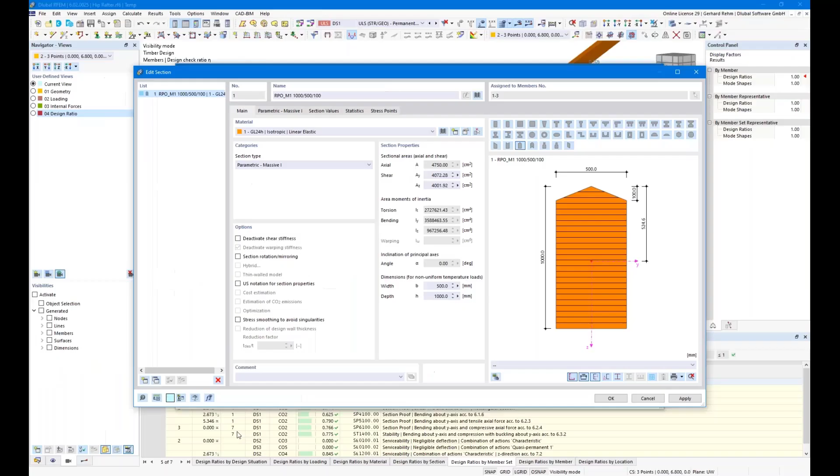So the question now is only if we need to consider also this reduction for the stiffness. For the design side, of course, we need to consider the reduction. When you imagine you have this bird's mouth cut here, and also a jack rafter is connected on the same location, that's an extreme example, and in this case we need to consider the netto cross section.

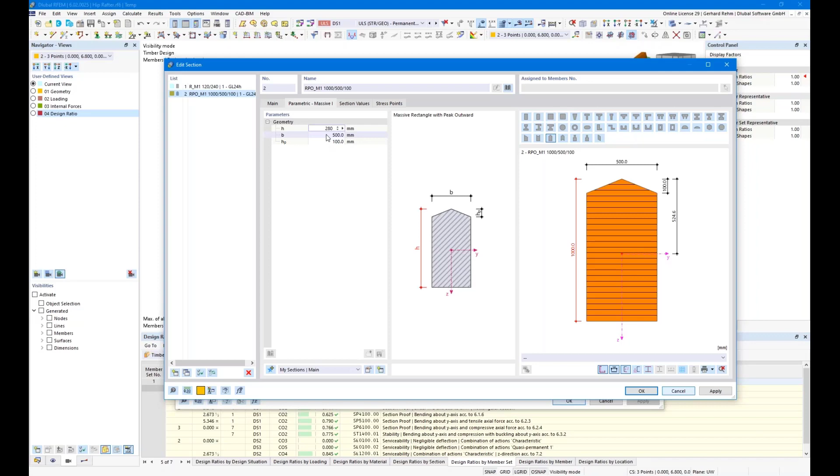So maybe let's create one example here quickly, you should have the time for it. Here we will change this to 200, maybe 280, and the width was 120, and this one should be 35 millimeter. Of course, you need to calculate the correct angle and then the correct height of this reduction. Okay, so let's change this.

Here we go. So now the question comes up, what about the stiffness? Is the stiffness correct by considering without the notches? I have prepared another example here. It's a solid structure which shows the influence of these dovetails. So let's switch off the results and see what we have here.

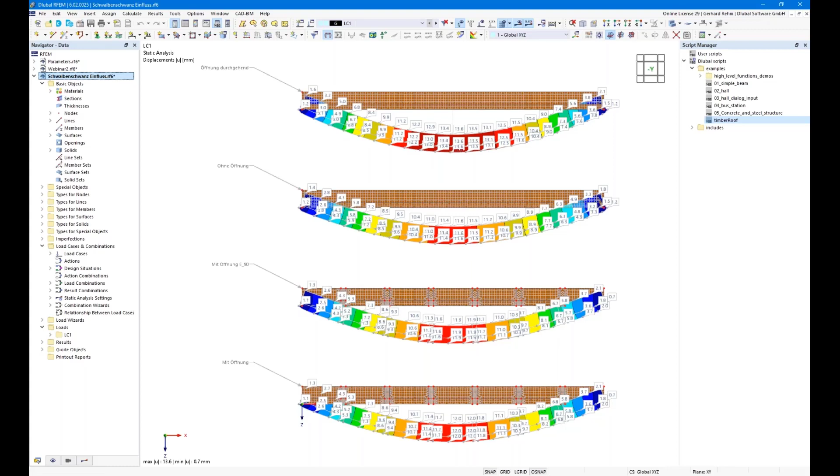So the first beam here, when we check the X direction, is a notch along the whole length of the beam. The second one is a solid one, a rectangle without any notch. And here on the third one, we have notches in between, but this notch is filled with a material with E90 - these materials are defined with an E modulus 90 degrees to the grain direction. And the same here, but without any parts inside the holes or inside the notches.

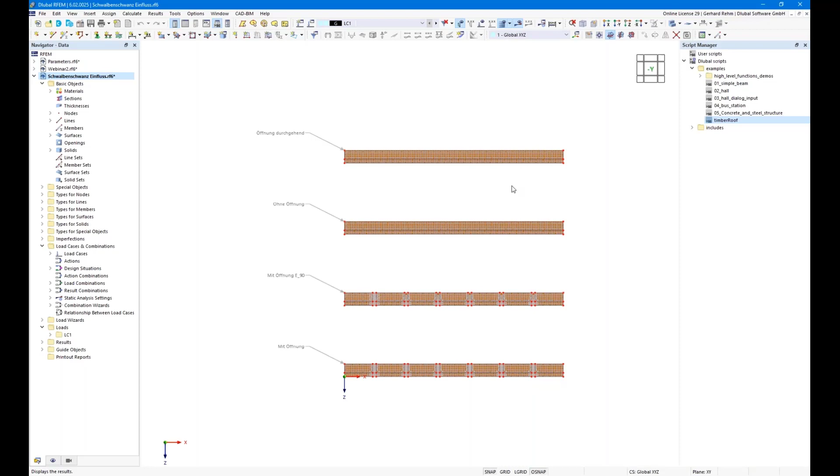Okay, so when we check the deformation to check the stiffness for this example, you can see the first one with the notch along the whole length is around 13.6 millimeter. Here we have 11.6, and here you can see that the reduction with the filled section is nearly the same - it's closer, of course, to the brutto cross section instead of the netto section. So that's why we can consider in this case the brutto cross section for the stiffness, but of course for the design we need to use the netto cross section.

And this is the next topic I want to show you how to do. So the stiffness here is correct, let's say, and let's go to the sections tab for the design. Here you have the option for this hip rafter to use a different section. So in this case, you can switch this and define the new cross section with a reduced section. For example, when we think about these dovetail connectors here, you can use this one.

Yeah, and here you can just enter everything, 280. This was 120 - let's say 40 just for example. This should be 120 minus 2 times 25 millimeters, so it's 70 millimeters, and this should be 16, maybe, I don't know.

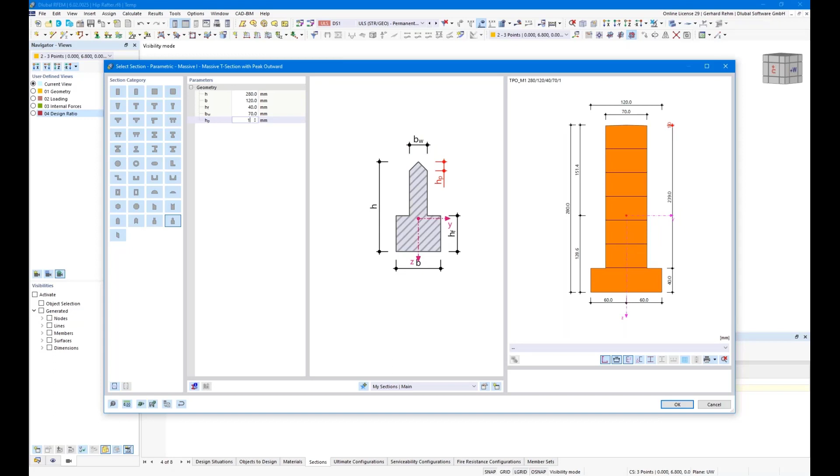Okay, so you see now you have this cross section, and this is the cross section which is used for the design for the ULS checks only. Of course, when you think about this on the bottom, maybe better to neglect this part completely - it will not help so much. So this is one way how to consider these reductions in this hip rafter, or in general, how to consider reductions in beam elements.

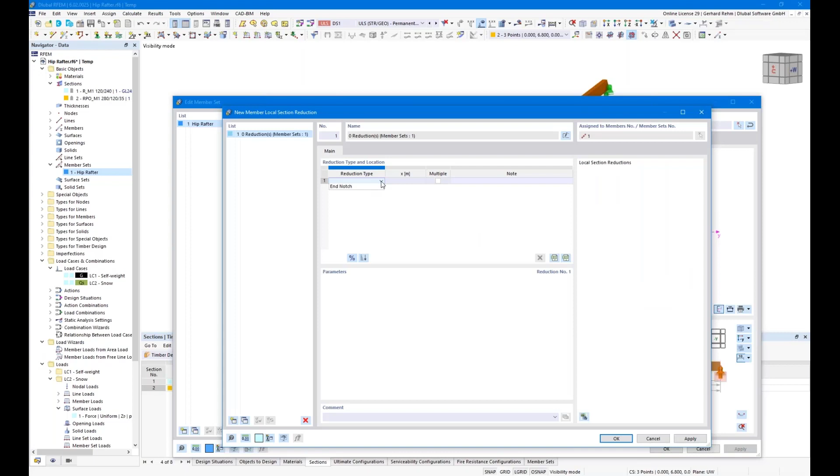For straight or for uniform rectangular sections, there's also the possibility here to define some - where is it? Member sets, here we go - to define some local section reductions, but they are based only on rectangular sections, and you can define only a notch along the whole height or width. So that's typical for these notched beams here. That's also possible.

My last example for today, before we finish, is another one: the load transfer surfaces, to show you what is possible. Okay, so let's think about this roof here. We have purlins and we have a hip rafter here, another purlin here on this side. And the question is always how to get the loads on it easily.

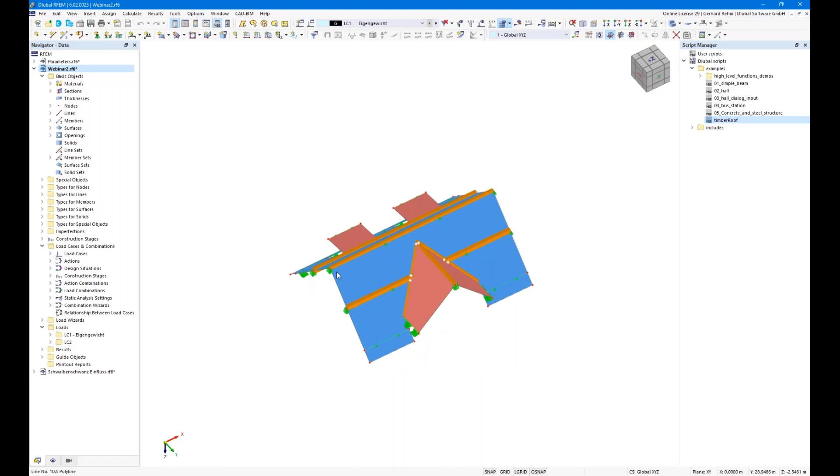Is it on the safe side to design the purlin with a whole load from this rafter, for example, or maybe when this building is taller, then of course maybe this is design giving, because this gives you a nodal load here, or it gives you a nodal load here in the purlin in the center. So that's always hard to get a good approximation. Maybe the load is too uneconomic, especially for the next parts - maybe there's a column underneath and maybe another beam underneath the column and so on. So maybe the load is then too much, and it would be good to have the real distribution.

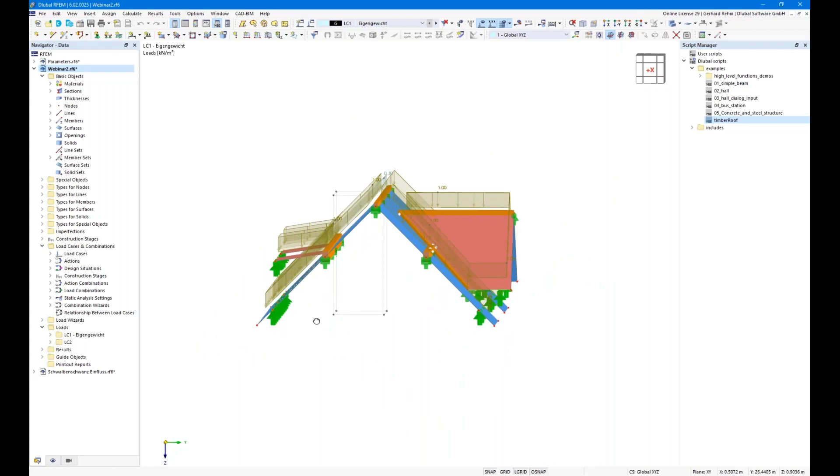Okay, so let's check the loads here. We have created one load case, and here you can see there is a free load as well on this surface, on this part. And let's check the distribution on the beams. So we can check this, and maybe better to check only the members. Okay, and now you can see directly the distribution, which looks really good.

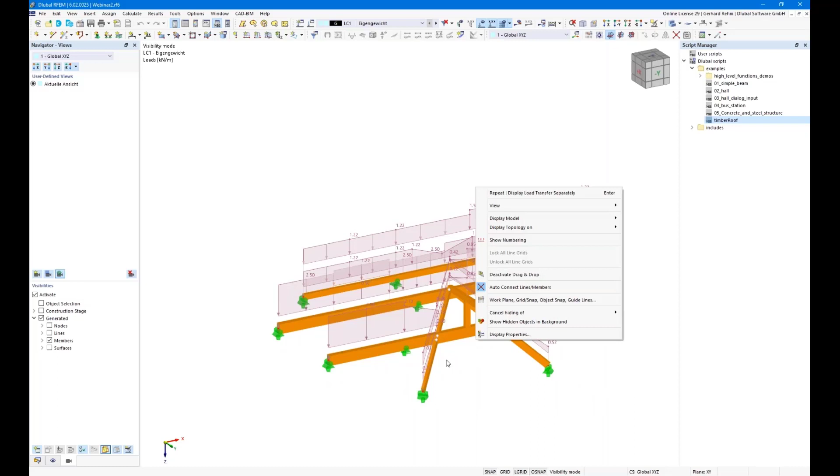So we see the reduction here for the purlin here on the apex, here the reduction because of the hip rafter here, and here we see because of this additional free load, we get more loads on it. And the big advantage here, you can see, I have this semi-rigid support considered here for this hip rafter, because the purlin is not supported here, but here. And this is a kind of, let's say, 2.5D solution.

And this helps you maybe to determine the loads, and especially when you think about parameterization, you will get the loads quickly, or you will get the designs quickly for this kind of structures. This should give you only an idea what is possible with this load transfer surface, and this maybe helps you in your daily job.